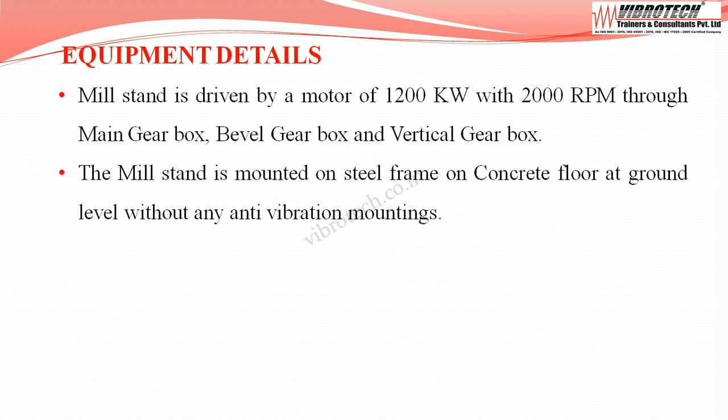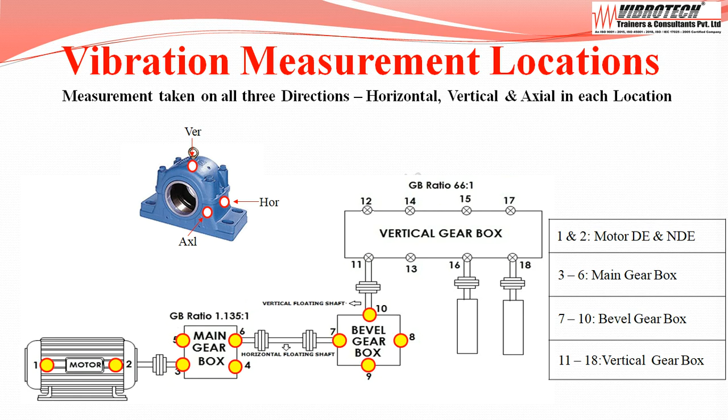Vibration measurements are taken in all three directions: horizontal, vertical and axial, in each location. Measurement locations are motor drive end and non-drive end bearing, main gearbox bearings, bevel gearbox bearings, vertical gearbox bearings. Vibration amplitudes collected are displacement in microns peak to peak and velocity in millimeters per second peak.

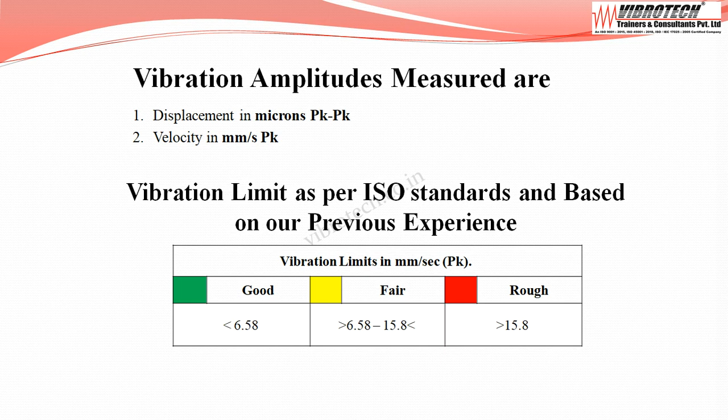Now onto the vibration limits. As per ISO standard and with our previous experience, when the velocity falls below 6.58 mm per second peak, it's considered as good. When the velocity falls between 6.58 to 15.8 mm per second peak, it is considered as fair. When the velocity falls above 15.8 mm per second peak, it is considered as rough.

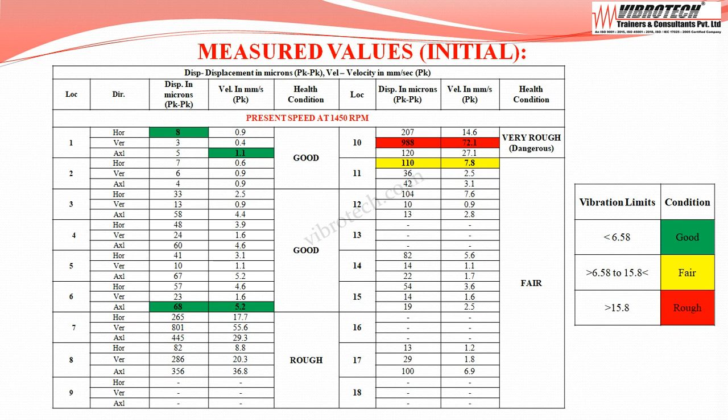Initially, vibration values are measured. Highest vibration value recorded at motor, main gearbox, bevel gearbox and vertical gearbox are highlighted. At bevel gearbox output shaft vertical direction, velocity up to 72.1 mm per second peak with displacement of 988 microns peak to peak. The equipment is in very rough category. Looking at spectrum of location 10, dominant peak values of 71.7 mm per second noticed at 1 times of running RPM, making equipment health condition very rough.

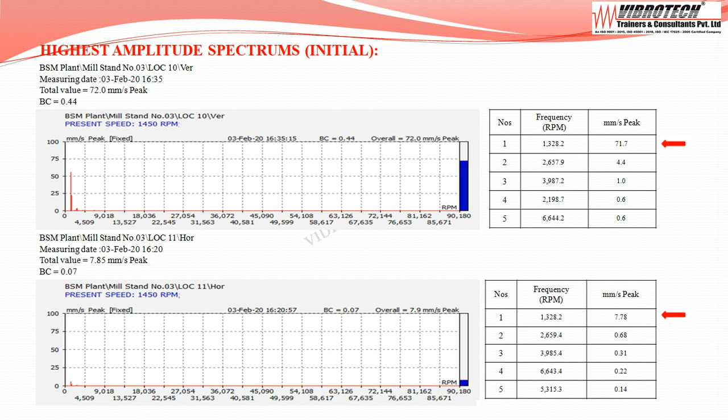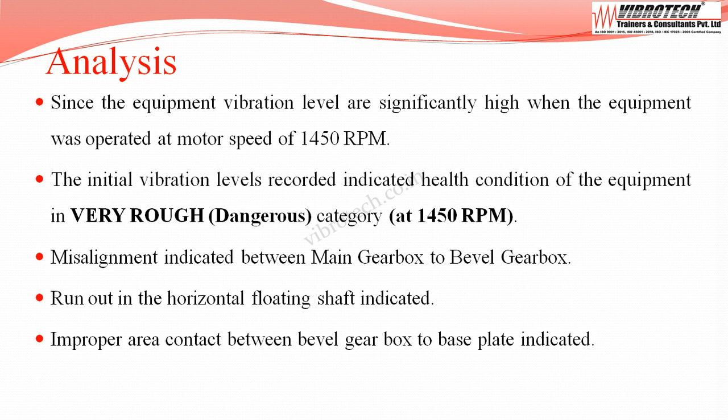Since the equipment vibration levels are significantly high, the equipment was operated at motor speed of 1450 RPM. Based on analysis, misalignment indicated between main gearbox to bevel gearbox. Runout in the horizontal floating shaft indicated. Improper area contact between bevel gearbox to base plate indicated. Rectification works carried out are: coupling alignment using laser alignment tool was carried out between main gearbox to bevel gearbox and bevel gearbox to vertical gearbox.

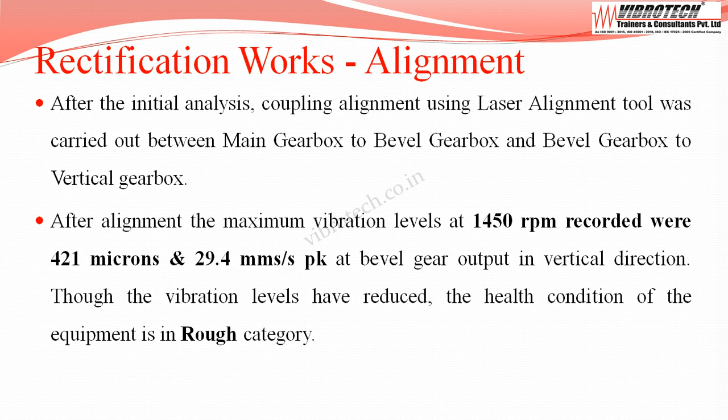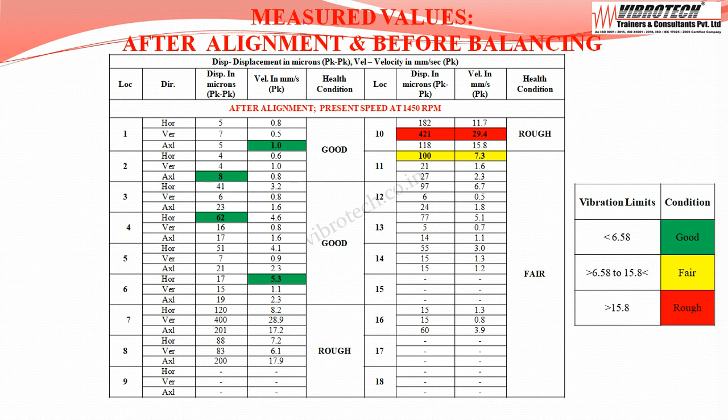After alignment, the maximum vibration levels recorded at bevel gear output in vertical direction at 1450 RPM were displacement of 421 microns peak to peak and velocity up to 29.4 mm per second peak. Now the health condition of the equipment improved from very rough to rough category.

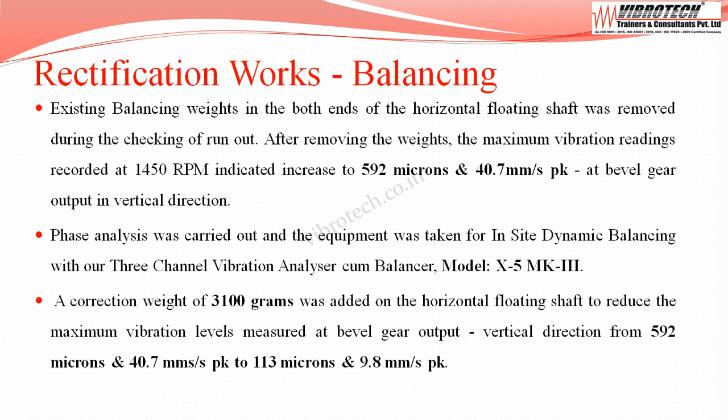After alignment work, existing balancing weights in both ends of the horizontal floating shaft were removed during the checking of runout. After removing the weights, the maximum vibration readings recorded at 1450 RPM indicated increase to 592 microns and 40.7 mm per second peak at bevel gear output in vertical direction. Phase analysis was carried out, and the equipment was taken for in situ dynamic balancing with our 3-channel vibration analyzer cum balancer, model X5 Mark III. A correction weight of 3100 grams was added on the horizontal floating shaft.

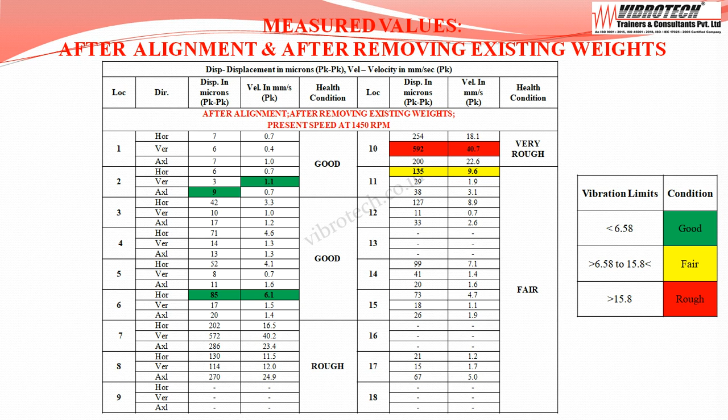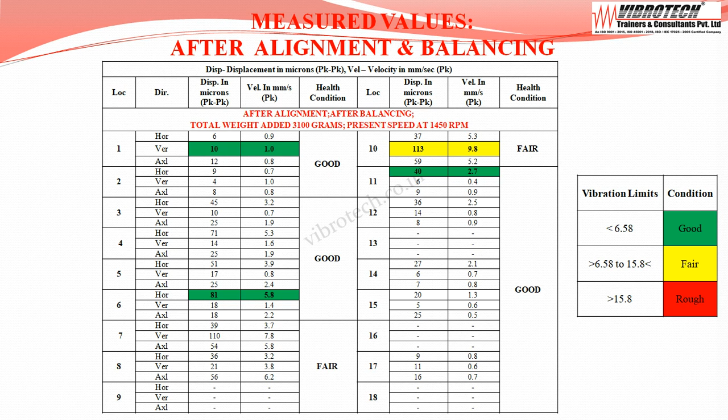The maximum vibration levels measured after alignment, and after removing existing weights, at bevel gear output shaft vertical direction, displacement of 592 microns peak to peak, and velocity up to 40.7 mm per second peak. The maximum vibration levels measured after alignment and balancing, at bevel gear output shaft vertical direction, displacement of 113 microns peak to peak, and velocity up to 9.8 mm per second peak. Now the health condition of the equipment improved from very rough to fair category.

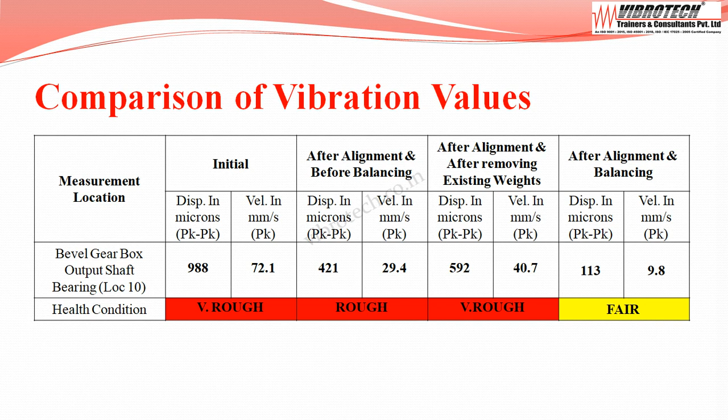Conclusions are: the health condition of the equipment has improved from very rough to fair category. Further reduction in vibration levels through balancing or alignment is not possible in its existing condition due to excessive runout in floating shaft in mill. The present vibration levels and the balancing weights added on the horizontal floating shaft are on the higher side and not as per good engineering practices, especially for such a newly commissioned machine.

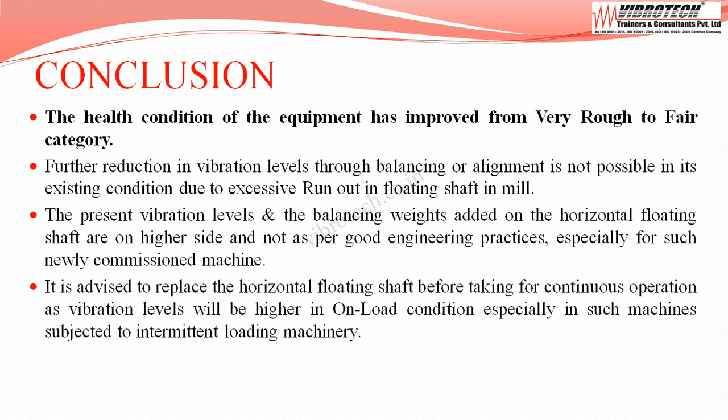It is advised to replace the horizontal floating shaft before taking for continuous operation, as vibration levels will be higher in on-load condition, especially in such machines subjected to intermittent loading.